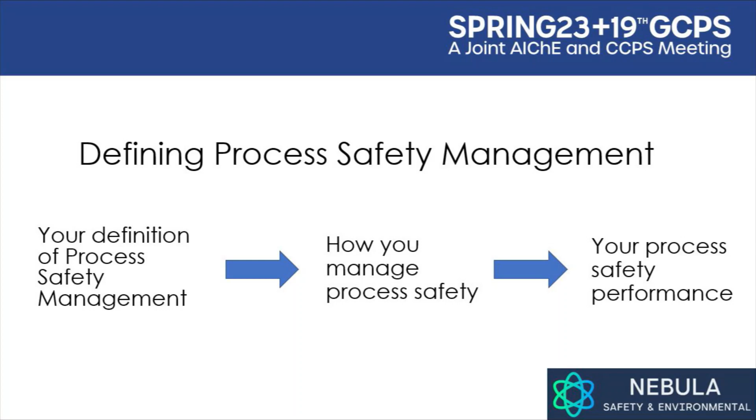So let's dive in and talk about process safety. What is process safety? I know what it means to me, but when I want to understand what it might mean to others, what I always do is pull up my good friend Wikipedia. Here's the definition of process safety in Wikipedia. It's got a lot of good things in there - it talks about release events, the Swiss cheese model, which I think is very important, and some good basic foundations for understanding how to think about process safety.

So if I'm the worker and I pull up process safety in Wikipedia, I can understand how this applies to my role, whether I'm in operations, maintenance, or engineering. I can walk through, think about my daily tasks, understand the Swiss cheese model, and relate that to what I'm doing. Think through what are the hazards that I can identify during my daily routine. How are we safeguarding or mitigating those hazards? And what can I do to boost the performance - what could I do to maximize the ability of the site to have top tier performance in process safety management?

So I really like this definition of process safety. I think it's very clear and very fundamental to the worker.

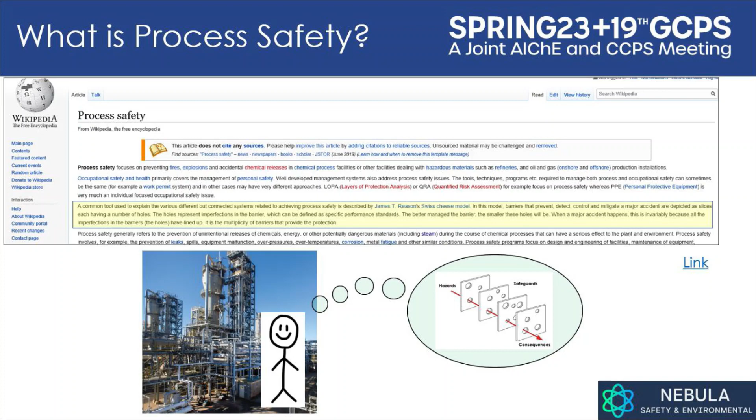Now, instead, if we pull up process safety management in Wikipedia, we get something completely different, which is a bit strange to me because we're just adding one word to process safety. We're just saying now that we're managing process safety, yet here it jumps right to the 14 elements.

It shows the 14 elements as a tool for managing process safety, leaving out the Swiss cheese model and some other critical information for that worker. This might leave the worker a little confused because it's harder to comprehend and store all this information, and it may not be necessary in their day-to-day tasks like performing operator rounds. They might not see those as process safety management tasks because they're not specifically listed within the 14 elements.

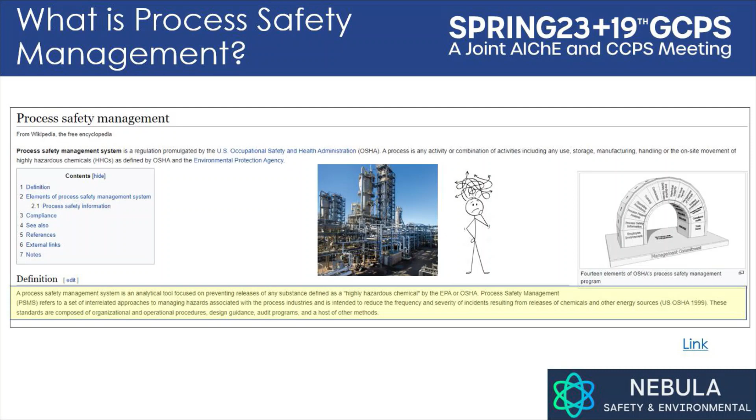So I think establishing a worker-centric framework for process safety management is very important. You want to include that worker in what is occurring at the site. A worker-centric PSM framework improves worker engagement in process safety management activities. They'll better understand what they're doing day in and day out and its link to the site's performance, which should ultimately result in improved process safety performance.

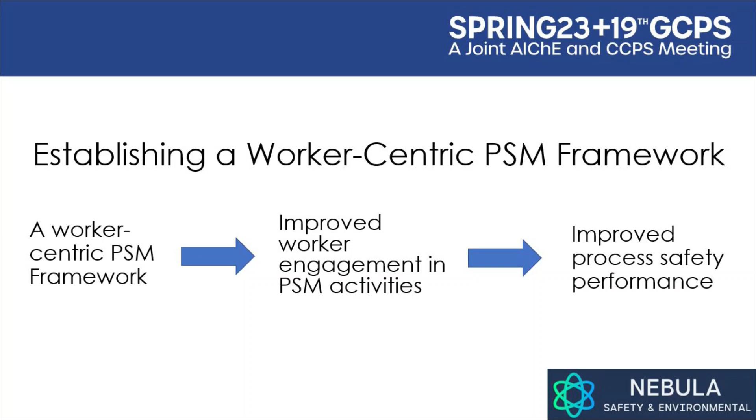Now, if you look at these 14 elements that OSHA has for process safety management in more detail, you'll find that they all map very well to the Swiss cheese model. All of these elements are done such that you improve the situation with the Swiss cheese model. What I mean is you better identify hazards at the work site pertaining to process safety management, you better understand your safeguards, and you plug the holes in your cheese such that you have really robust safeguards in place.

Workers are conducting studies like PHA such that new hazards are identified, safeguards are implemented and made robust enough to prevent the incident and also to mitigate it, and that consequence scenarios are effectively mitigated as low as possible for the site. So I feel like all of these 14 elements coincide with the Swiss cheese model, and really improving the situation with the Swiss cheese model is essentially the aim of the activities conducted for these 14 elements.

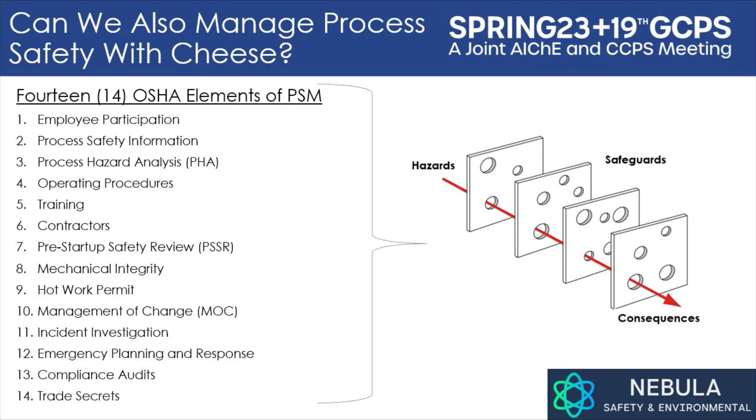But what about all these other activities that workers perform? For instance, many workers are involved in lockout tagout, job hazard analysis, or they might be involved in reliability assessments. Maybe they'll do process engineering surveillance on parameters that, if they don't go well, could impact process safety performance negatively. Other workers are involved in emergency notification, disabling safety critical devices, performing operator rounds, donning PPE.

So there are many field-based activities that are front and center for process safety management. If these activities don't continue to go well, that can negatively impact process safety management performance. So what do we do with these activities? Do we leave them out of the model, or should we pull them into the framework?

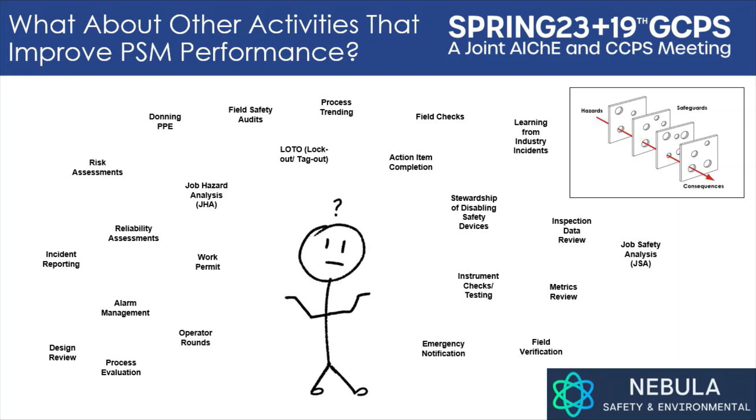My thought is that we should pull them into the framework and actually put them right in the middle. I feel like these activities can have an imminent effect on mitigating or preventing process safety incidents. A worker-centric process safety management framework pulls in all of these activities and puts them front and center, right next to the Swiss cheese, which is the aim of every single process safety management activity, to improve the situation with that Swiss cheese. So in my worker-centric PSM framework, I put those activities right around the Swiss cheese.

Those are activities that could prevent or mitigate an incident in process safety management that may be imminent, likely to occur immediately, within minutes or hours. So these are very critical activities, and they should be the focus for field folks on a day-to-day perspective. When they're going about doing these tasks, they need to be thinking: if I don't do this well, or if I miss something, what could be the impact? And then go forward and do those tasks with excellence.

Also, the other activities are additionally important, whether these are studies conducted in process safety management or incident investigations.

All of those activities are very important too, and I think those should additionally be on the framework because they also are focused on improving the situation with the Swiss cheese model. So what I've done here is put the Swiss cheese in the middle, put the worker activities or field-focused activities directly around that Swiss cheese to show that they are what's imminent and can really help to urgently prevent a process safety incident.

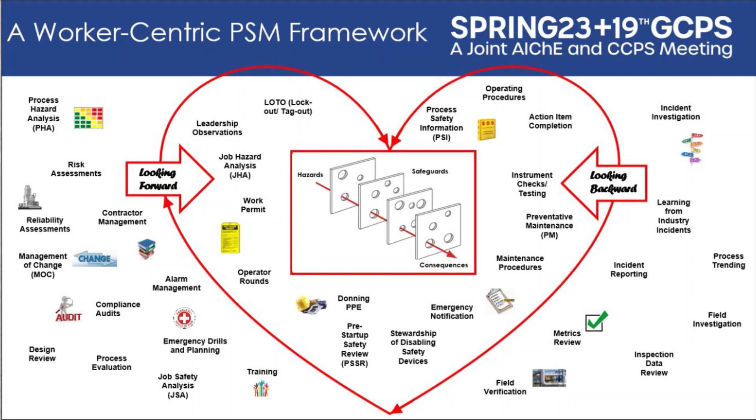Now I'll get into what I call supercharging the sharing. So with sharing process safety management, a lot of sites think, okay, we have an incident, great, we will share what we learn with our workers.

However, what I've found is there's a lot of great incidents out there, external incidents, that are very high consequence severity - these could be fatality level incidents or serious injury incidents. These are great to share with your workforce because it's building the sense of vulnerability among your workforce. Maybe you haven't experienced a very catastrophic event where there's been fatalities or serious injuries as a result of a process safety management incident. Well, there might be a lack in a sense of vulnerability for the workforce then. Sharing these external incidents where these catastrophic consequences have occurred can help to build that sense of vulnerability, get people to think more deeply about what is possible at the site and what their role is in preventing and mitigating those incidents.

It also helps with identifying the precursors or warning signs that an incident might be unfolding. So in the incident investigation reports for many historical incidents, they share the timeline of events or the sequence that occurred the day of the incident. Walking through those sequence of events with employees can help them better understand, if I see these warning signs at our site, then what action will I take? Will I make the right decision and help to stop that chain of events from unfolding? Or will I miss it? And what could make it such that I'm more likely to catch it if this is unfolding at our site?

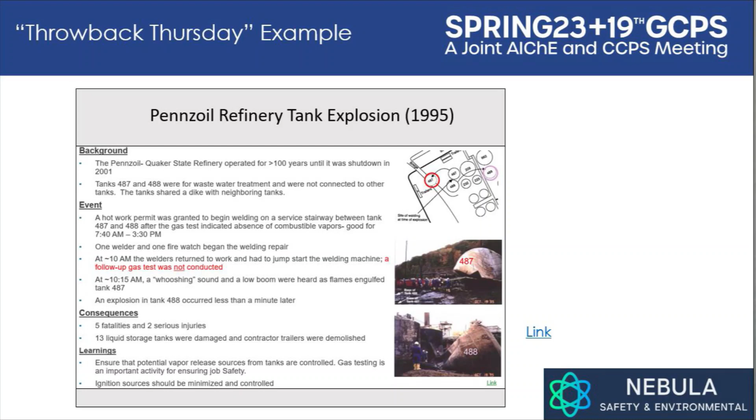Then oftentimes I'll move to a backside, and for this one on the next slide you can see that there's a backside here that points to what the incident investigation team was able to learn and what they weren't. And that's because there were several sources, potential sources of vapor release during this incident. So they weren't able to definitively state which source of vapor release it was, but they were able to point those out on a diagram and then also talk through the potential sources of ignition.

Information like this is what I believe is very important to highlight to workers, because if you're a maintenance worker and you're going to perform work like this, do some welding work around tanks, it's important to be cognizant that there's multiple sources of vapor and what those are and how we can protect ourselves from having a release of vapor while the work is being conducted.

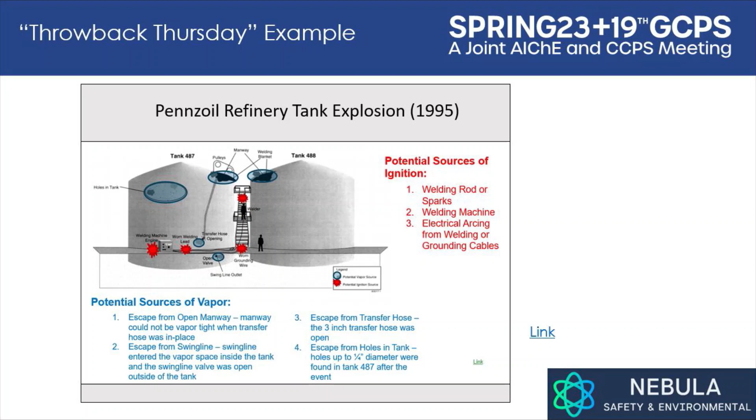And then also think about the ignition sources that are being introduced both by the welding machine as well as other activities that maintenance is conducting. It's important to highlight this sort of information, and I routinely do that when sharing process safety incidents.

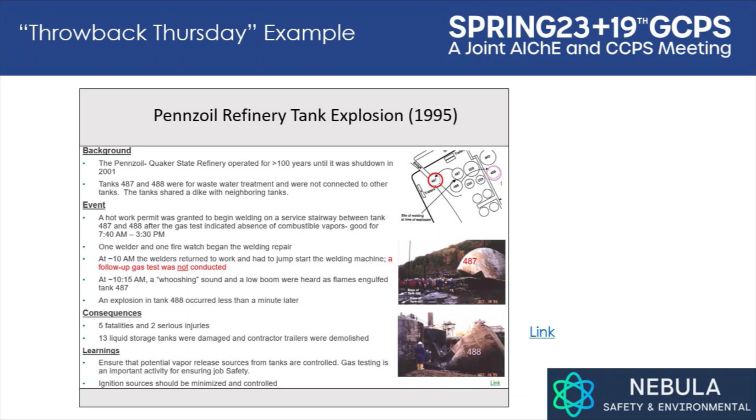And then we'll talk about the consequences that occurred during the incident. Unfortunately, during this incident, there were 5 fatalities and 2 serious injuries, and then we go through and share the learnings for the particular work site. What are the things we can learn from this? Do we do welding similar to this on tanks? Would we be susceptible to a similar incident? What do we do in terms of our programs, processes, and work practices to prevent a similar incident at our site?

Now I'll share a brief story about September 19th, 2019. This was a day I was presenting about Throwback Thursday. This is a safety sharing effort, sharing safety moments on a weekly basis so folks really understand the sense of vulnerability and can see the importance of process safety management and the importance of their work in preventing process safety management incidents.

On September 19th of 2019, I went to share this effort at the Community Awareness Emergency Response Safety Summit in Northern California. I remember opening up and saying, hey, welcome. Today is a special day because today marks the day we've shared our 50th Throwback Thursday safety incident. It was a Thursday, September 19, 2019. Then I went on to share the process, what we're doing, some of the formalities around it in terms of structure and why, and got done giving the presentation.

Immediately after I stopped talking, there was a regulator in the front row who stood up and started clapping. I was a little shocked by that. But then the whole audience stood up and there was a standing ovation. I panned around the room and saw 4 different enforcement regulators who were regulating us at that time stood up and clapping to my presentation. I was really shocked. I didn't think anything I'd done was that clap-worthy.

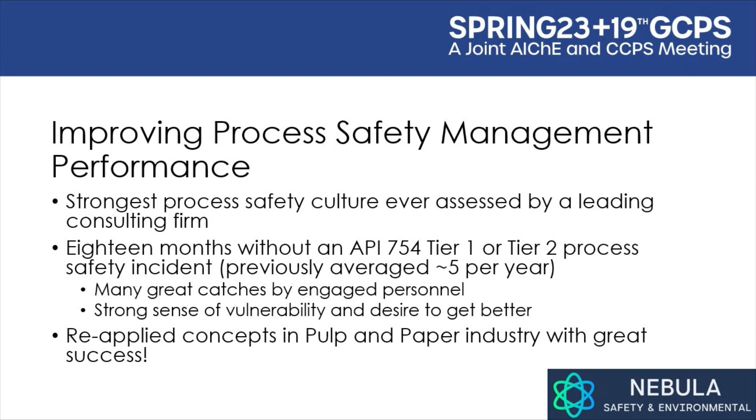Now, I've since reapplied many of these concepts in the pulp and paper industry, and I've also had great success improving the culture and the performance. I hope you enjoyed the presentation. I did receive two really good questions after the presentation that I also wanted to share with you today.

The first questioner was asking about bulletins, and if bulletins would be sufficient for sharing process safety information. My reply is that bulletins are very good, especially if you have an incident that just recently occurred and you want workers to understand what the gaps were, so you can prevent a future incident from occurring. However, bulletins do have limitations.

They're not as personal as sharing in video format. So if you're talking about bigger incidents, fatality-level incidents, or sharing external incidents that have occurred, I believe it's important to share in video format. It becomes more personal and drives a deeper amount of introspective thinking from the workers, so they think more deeply about what can occur and how to prevent an incident.

In fact, when I share the Throwback Thursday incidents, I always share a picture or video of myself, describing and setting up that incident, and then I'll cut to a voiceover of the PowerPoint after that.

Then once I'm done walking through the sequence of events and talking through the consequences, I'll share the lessons learned face to face with the audience via video format. I think that's important because it helps nail down those lessons learned, so everybody's on board that these are the things our site can do to prevent an incident like this from occurring.